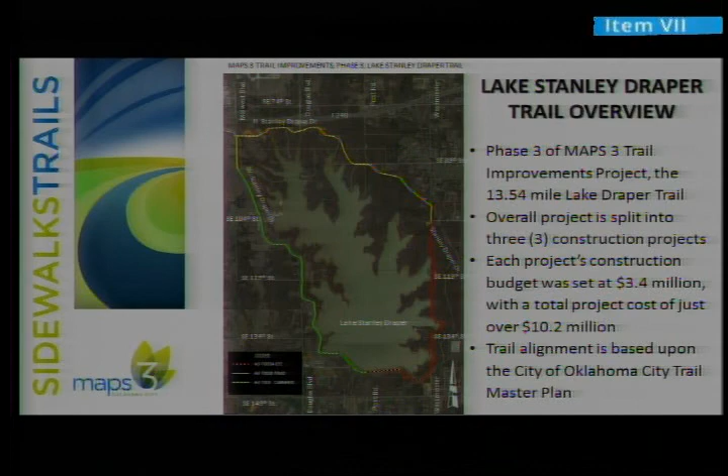The trail does follow the Oklahoma City Master Plan for the alignment in most locations. There were a few adjustments made and suggested by the MAPS Trail Subcommittee that were incorporated into this project. As we go through here, all of the trails are basically following the standard that's been set for previous trail projects throughout the city.

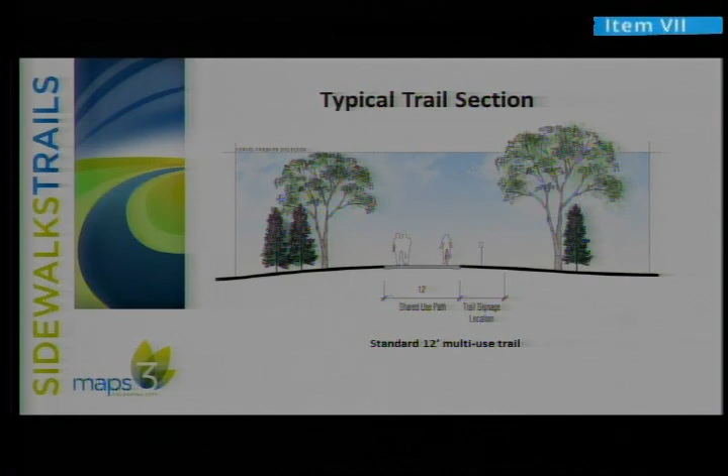It's a 12-foot multi-use trail. It does have trail signage throughout the project, which tells you exactly how far and where you are on the trail system. This trail is more of a rural trail system, so we do not have any signalized intersections. We're utilizing a city standard developed with previous trails for non-signalized street crossings, highly visible for pedestrian as well as vehicular traffic. These will be concrete, consistent throughout the entire Draper Trail for all of the projects you'll see.

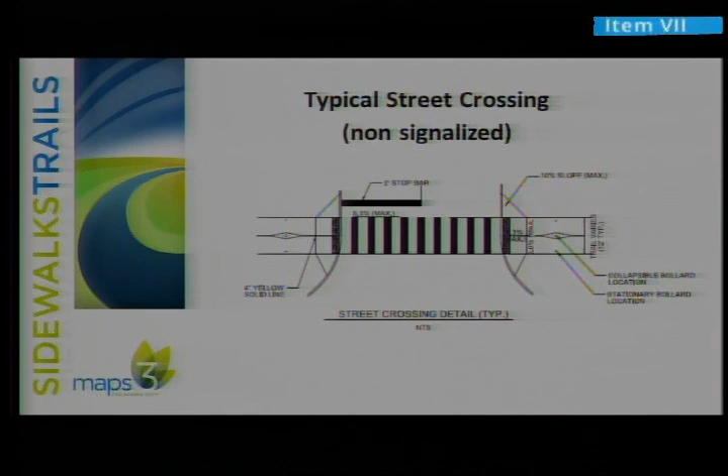Our project is Project T003, basically along the western portion of the lake, probably the more developed area so far. Our project starts at Southeast 89th Street, where we will tie to Mr. Williams' project — that'll be up in just a moment.

It basically follows West Stanley Draper Drive, about 25 feet off of the roadway. If you've been out there, you'll know the roadway has a 45-mile-an-hour speed limit. We want to make sure the trail is off of that, in what we call the clear zone, for any errant drivers that have run off of the road, so they still have time to recover before they get to the trail.

So we want to make sure the trail is visible from the roadway, yet still a safe distance away from any errant drivers.

Our project is a little bit over 5 miles, or just a little under 5 miles. It does have accessibility to the marina area and parking lot that could be utilized as a shared use trailhead location. It does have 3 significant street crossings at 89th, 104th, and a little bit farther down along Water Plant Road. It also has another access to the Cross Timbers trail parking area and recreational area that we could use as another trailhead about midway along our trail alignment.

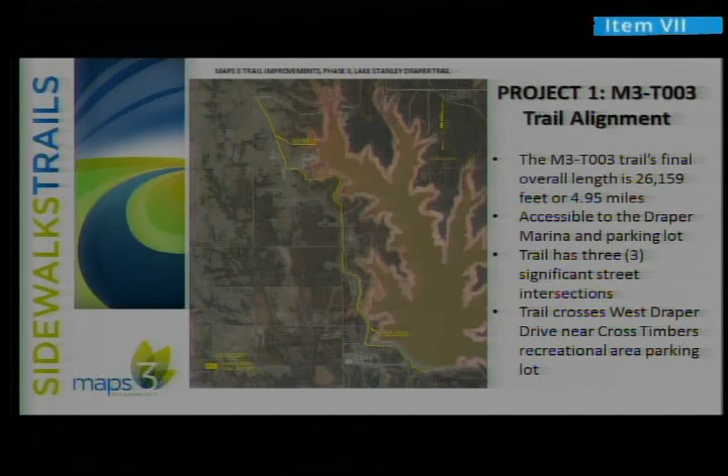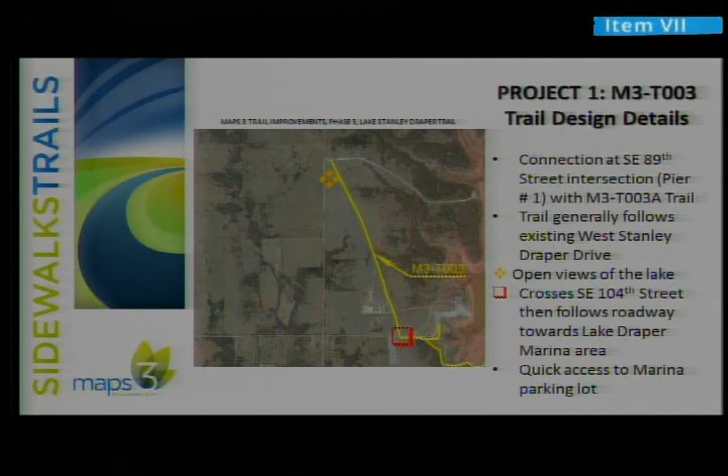As we say, we started basically at Southeast 89th Street. It's a very open area. It does go south and southeast adjacent to the roadway and attaches to the Lake Draper Marina area. Some of the views you will see along the trail, particularly in our area, are a little more open than in some of the areas on the southeast side of the lake. But you can see here we do have some views of the lake as we start southwards towards the marina.

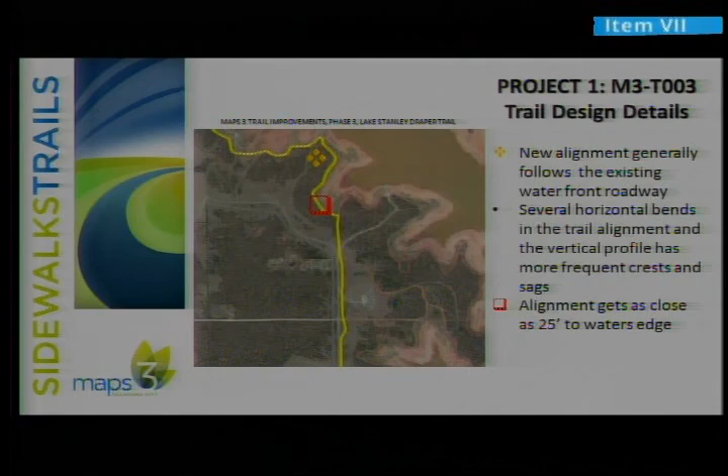One suggestion from the MAPS subcommittee was to get a little closer to the lake, in areas similar to Lake Hefner's trails. We've done that. It did add some horizontal curves to the trail, so bike pedestrians may not be able to speed through this area. They will have to slow down, but we take into consideration that pedestrian traffic will also be jogging through this. So it does have some nice views and vistas of the lake.

The trail will eventually connect to the Baxter Remote Control Airfield. It does have a connection there. We do stay on the east side for a majority of the trail, on the east side of Lake Draper Drive, near the Cross Timbers riding area. We do switch back to the west side through this.

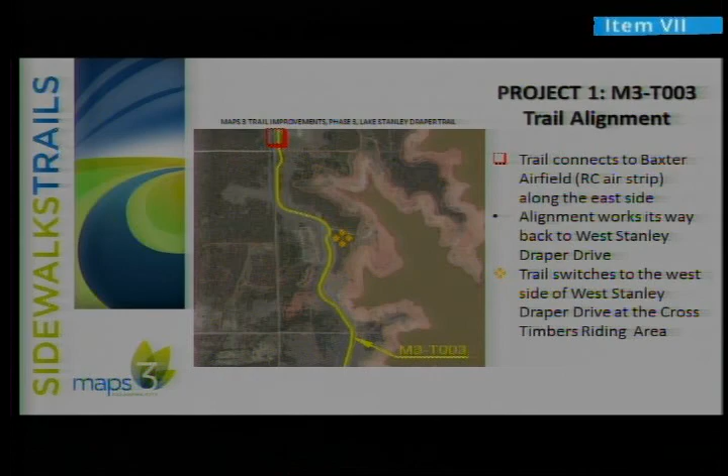We do have advanced signage for both the West Draper Trail as well as the West Draper Drive drivers. Lastly, our section terminates on the lower side of the dam, just to the east of the existing Draper Water Treatment Plant.

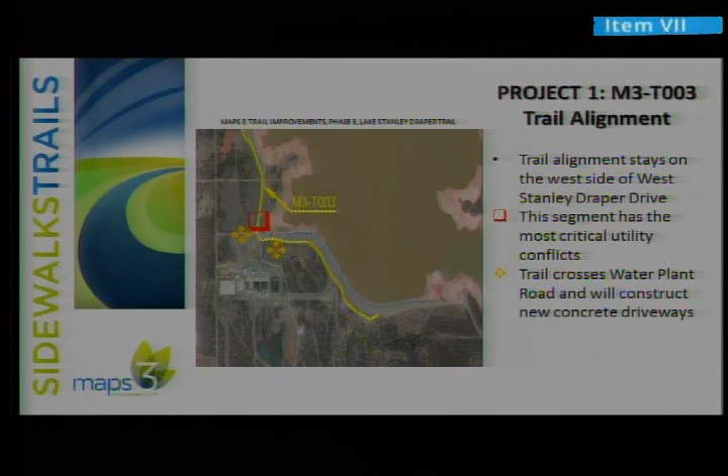It does cross the Water Treatment Plant Road, which right now is under construction. Our project will be there first. So we are going to replace the drives we go through there with concrete drives that will handle construction traffic as well, but it'll also give trail users a very smooth and consistent surface for walking, riding, and biking.

Lastly, as we continue south and east below the dam, we wanted to make sure the trail had a visible view from the dam road itself. We want pedestrians, bicyclists mainly, that are utilizing the roadway to see where the trail is, see how friendly it is, see it's very open, with views and vistas. So we want to make sure our trail is visible from the roadway so we can get some of those bike users off of the roadway and that conflict with vehicular traffic, and get them on our trail system.

As we mentioned earlier, our budget is just a little more than $3.4 million. The initial concept was just above $3 million. As we've made adjustments based on suggestions from the oversight committees, that cost escalated slightly. We've gotten that back down to below budget again. Today, our estimate is almost $3.4 million, and we do still have a small contingency in there just for any anomalies that may occur in the bidding process in the next few weeks. So we are under budget.

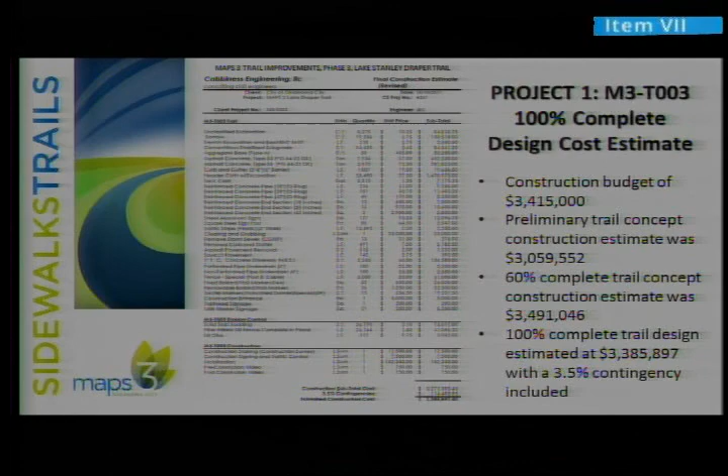Approval today by the council. Our schedule here is we're ready to advertise, go bid this project in late November, come back to the council for award, and be ready to issue a notice to proceed for construction in January. We anticipate construction is going to be 6 to 7 months, weather depending, and construction will be complete in August. Hopefully this trail is used by the end of summer and early fall next year. Happy to answer any questions.

All right, any questions? Thank you. All right, thanks.

Next up is Robbie Williams from Triad to talk about another section of the Draper Trails. There's 3 sections. 2 of the 3 will be going out to bid today.

Okay. Good morning. Good morning. Robbie Williams.

We have the Lake Draper Trail Phase 3, and we will connect with Mr. Cabinet's trail at Southeast 89th. We'll go north. Our trail is on the north side of the lake and the east side. We're more in the rural area. There's no connectivity to any existing facilities.

So I'll run through this. I'm not going to go through a lot of what Brett said. Our project, we are 25 feet off the road for the clear zone and the safety. We have several drainage structures that we have to extend, which we will do. But we will bring the trail in closer to the road and install guardrail, that way we're not spending more money to extend a structure. So with that, we'll get going.

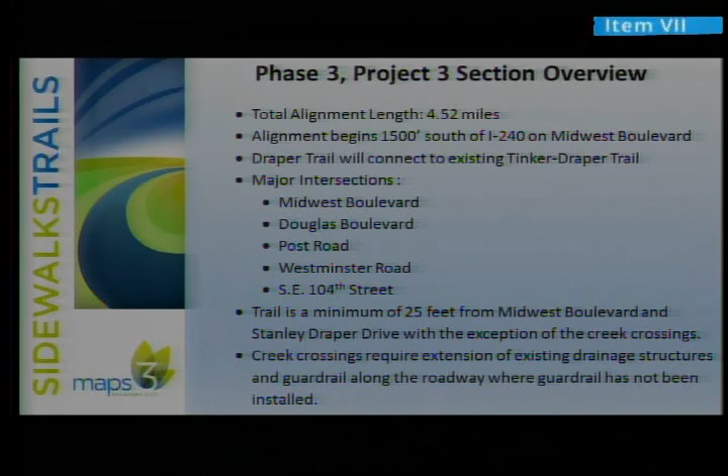Our trail is about 4.5 miles long. We have major intersections at Midwest Boulevard, Douglas Post, Westminster, and 104th Street. There's not a lot of traffic, but we will put in the crossings. I mentioned the 25 feet clear zone and the creek crossings.

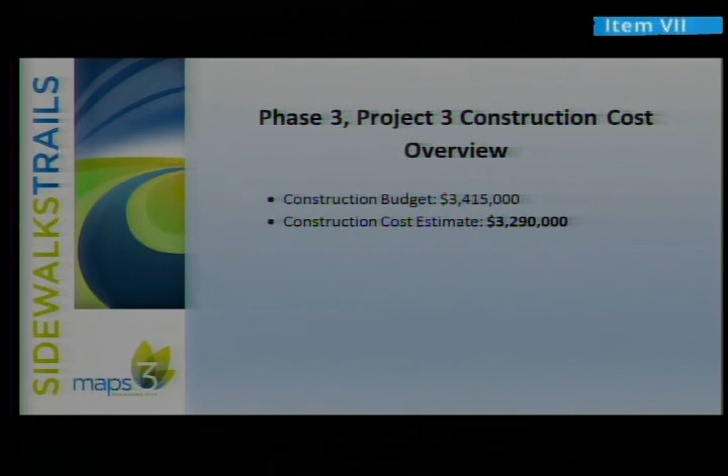Our construction budget is the same as everybody else, about 3.4, and right now we're just under $3.3 million.

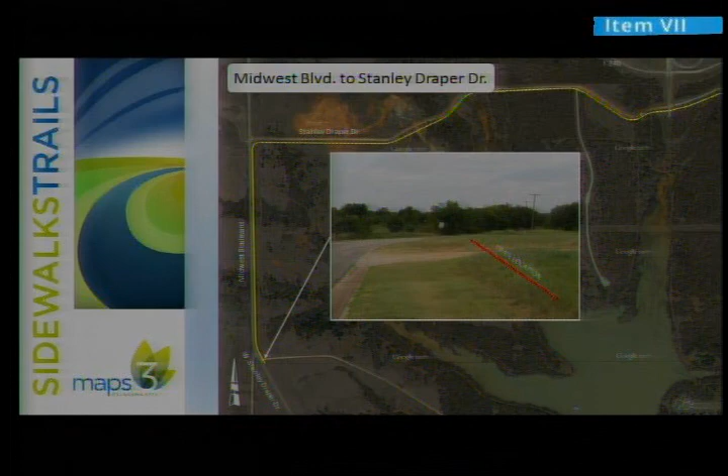We'll just kind of go through the trail alignment with the picture. Again, here's where we connect. The red line will be generally where the trail is located. And as we go along, we do have some areas where we will clear trees and vegetation. One of our project goals is to minimize tree removal around the lake.

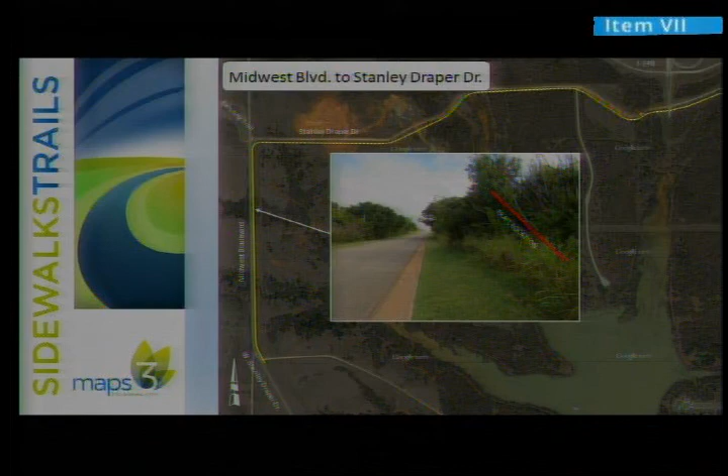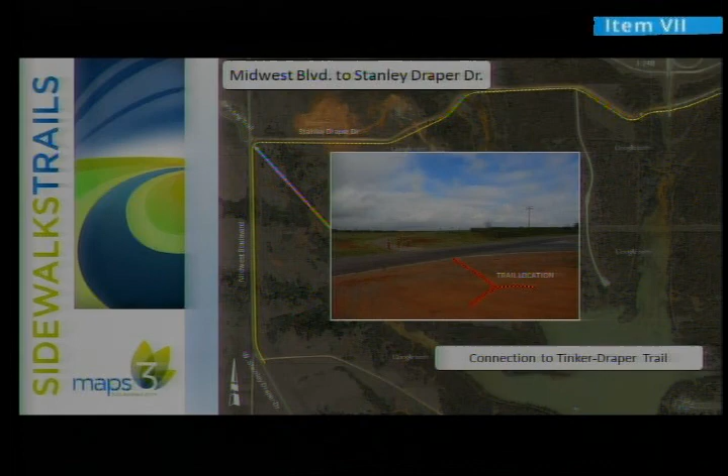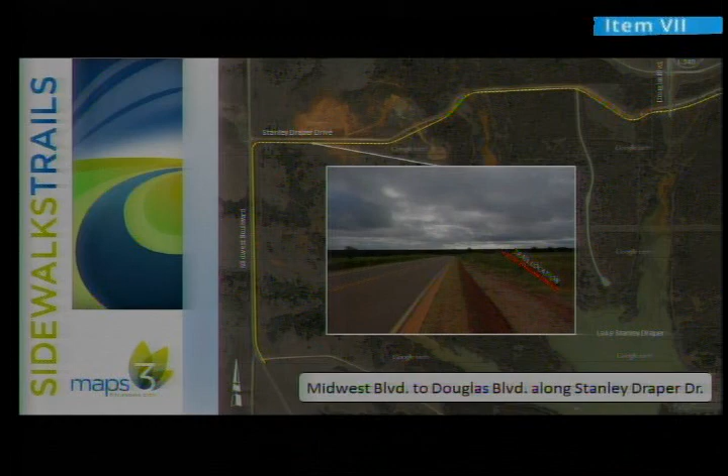Again, here's a drainage structure that we will be extending as we go north. At the intersection of Stanley Draper Drive and Midwest Boulevard is our connection to the Tinker Draper Trail. About a year ago, the Water Trust reconstructed Stanley Draper Drive, so our trail will basically be following the roadway. Again, just another small culvert we will be extending.

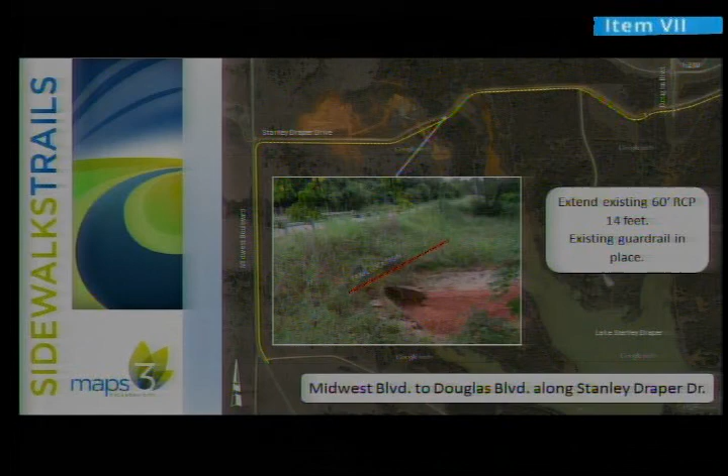Here's where we start getting into the wooded area. Again, another structure - these all start to look the same here in a second. Our trail does have a few locations where you can see the lake, and this is an example of one of those locations.

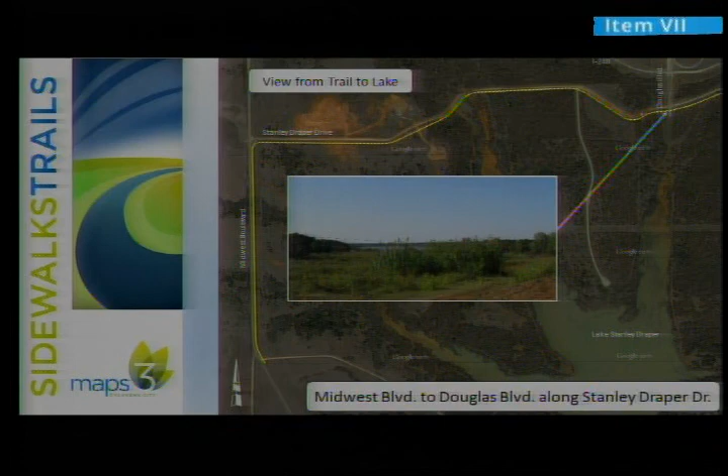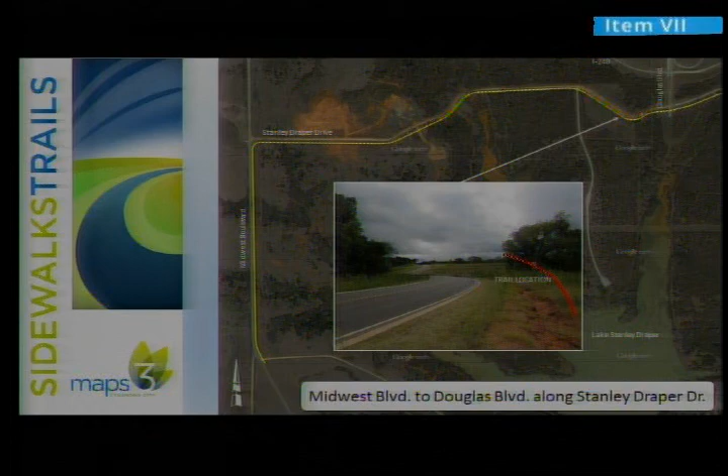Again, we're following Stanley Draper Drive. The new Stanley Draper Drive that was constructed connects to the existing Stanley Draper Drive on the east side, which is actually a 25-mile-an-hour posted roadway. Again, here's another culvert that we will extend.

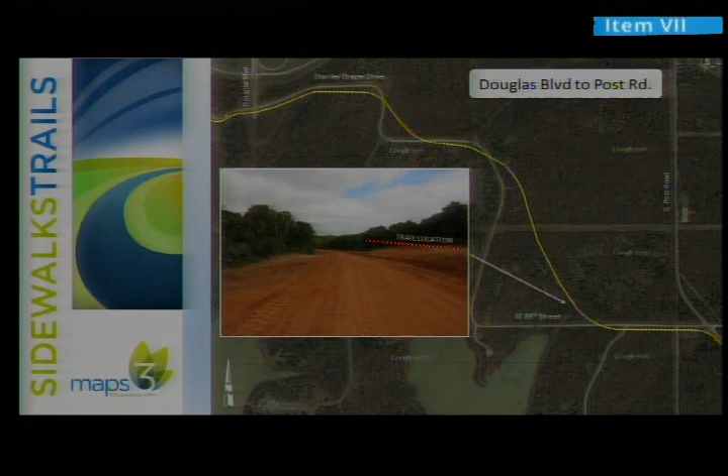And now we get more into the rural part. This was when the road was under construction. Our trail will be up on the hill, and we will be removing a few trees. Here's a good example of where we will have to clear trees, probably about 50 feet wide as we go along the road.

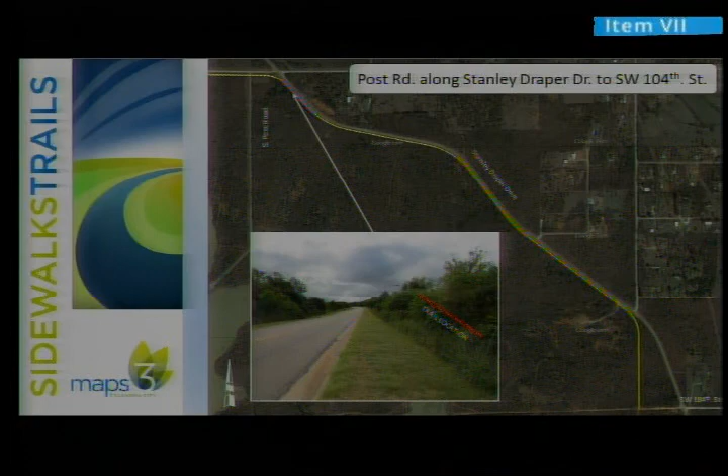Same thing here. And then we do veer off of Stanley Draper Drive, and there's an existing dirt road where we will locate the trail. This is the connection to Project 2, which I believe is coming in about a month.

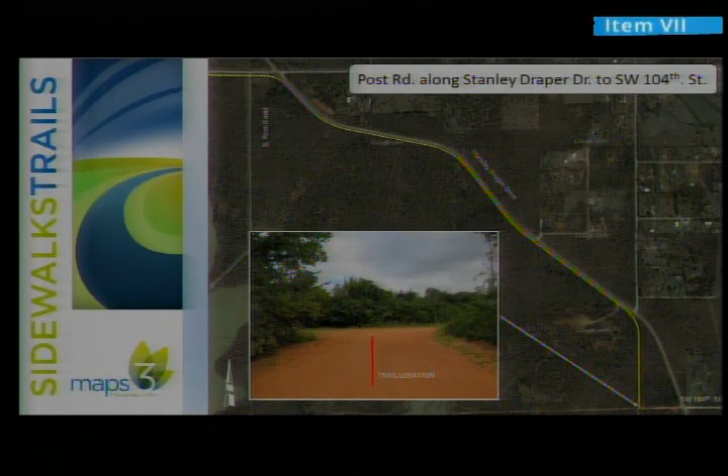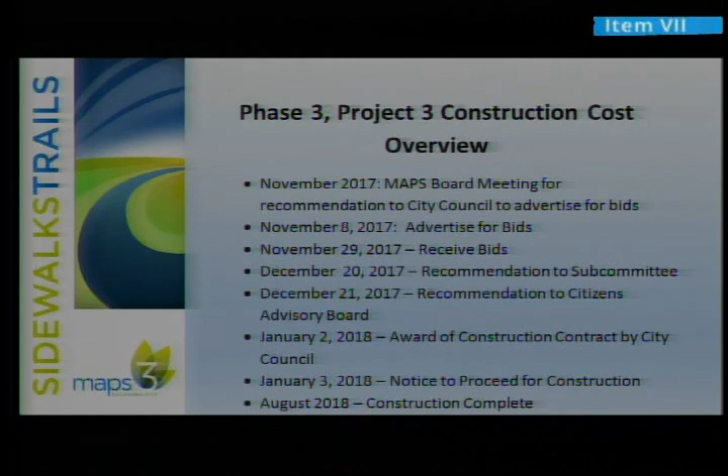So do these two presentations add up to the entire MAPS 3 trail out here? Is that 9.5 miles? No, there's 3 segments. These are 2 of the 3 segments going out to bid today. A 3rd segment will be coming forth in the next few weeks. So what's the total distance of the trail? About 13.5 miles. And ultimately it will tie into our larger system.

Yes. So how many miles is it from the closest point today to where this trail begins? If you're talking Grand Boulevard near Trosper Park? Well, David, can you talk about the connection?

Robbie, you're connecting up at the northeast or northwest corner, right? Yeah, Tinker Draper Trail, he's connecting there. I'm not familiar enough with that trail to know how it connects with Trosper and all that, so I can't answer that right now. But long-term, we have plans to connect this trail with the other aspects of our trail system. I'm not saying it's funded, just that there's a plan to. I think planning's goal is to create a trail system that connects like that.

So phase 2, we expect to send it out to bid in about a month, is that right? This is phase 1 and 3, correct? Right, phase 2 had a couple things we need to get fixed, and we need to stagger those bids anyway so we can strategize how they get bid. It's scheduled to go to the subcommittee next week and then the advisory board, so you guys will see it right around the 1st of December.

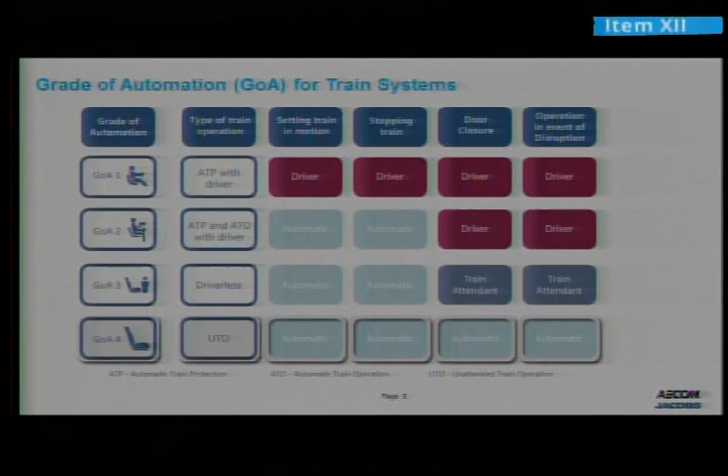There's a lot of buzz lately in terms of autonomous vehicles. Autonomous operation of rail systems actually has a fairly long history. Beginning in 1967, there was the first automatic train operation in the London Underground. The vehicle operates with a driver in the cab, so the driver on board is really more of an operator attending to customers. Next, in 1983, in France, you had unattended train operation. That system has been in operation since the early 80s. There are no recorded fatalities, so it has a pretty high safety standard.

Moving on to grade of automation 2. These are trains that run autonomously from station to station, and the driver remains on board and is responsible for opening and closing doors. One example of that is the BART system up in the Bay Area in California. It's been operating like that since 1972. So there is an operator in the cab, but that person's not actually controlling stopping and starting of the train.

Grade of automation 3: there are none in the United States, but there are some, notably in London, Barcelona, and elsewhere in the world, and those systems have been in operation since 1987. And then finally, grade of automation 4, this is the one where the vehicle is completely autonomous. There are 15 operating in the United States. The example we're showing here is the Miami Metromover, but usually these are vehicles that are on a completely separated guideway, so they're not running in mixed traffic and they're not interacting with pedestrians or cyclists.

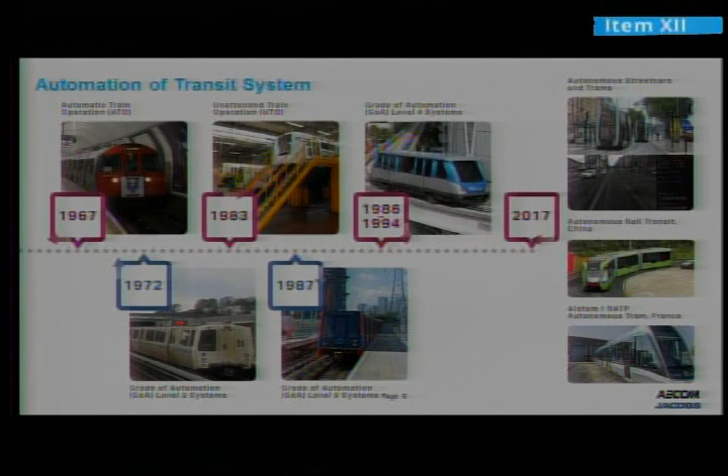Moving on to the definitions of connected and automated vehicles for vehicles, not for rail. The US DOT defines autonomous vehicles as a vehicle where some part of the vehicle function is not controlled by the driver. So those vehicles can be automated and/or connected.

For connected vehicles, there are various levels of connectivity. The first level is vehicle-to-vehicle communication, where the vehicle is able to communicate with other vehicles on the road. Next is vehicle-to-infrastructure, where the vehicle can communicate, for example, with signals or with light posts. And finally, vehicle-to-everything, where the vehicle can communicate with other vehicles, infrastructure, and other users of the right-of-way. So for example, if I'm a pedestrian or cyclist, I would get a notification that an autonomous streetcar is coming up, and I should slow down or stop, and vice versa—the vehicle might know that there's another user of the right-of-way there.

In terms of the regulatory context, it's moving rather quickly in parallel with some of the developments in the technology. There are a couple of federal regulations and guidance documents that are applicable for our study here. The first one is the vehicle-to-vehicle communication guidelines from the federal government, and this regulation proposes that 100% of new light-duty vehicles are equipped with vehicle-to-vehicle communication by 2023, and notably that the communication systems will speak the same language. So for example, a Toyota and a Ford would be able to communicate with each other and other users of the right-of-way.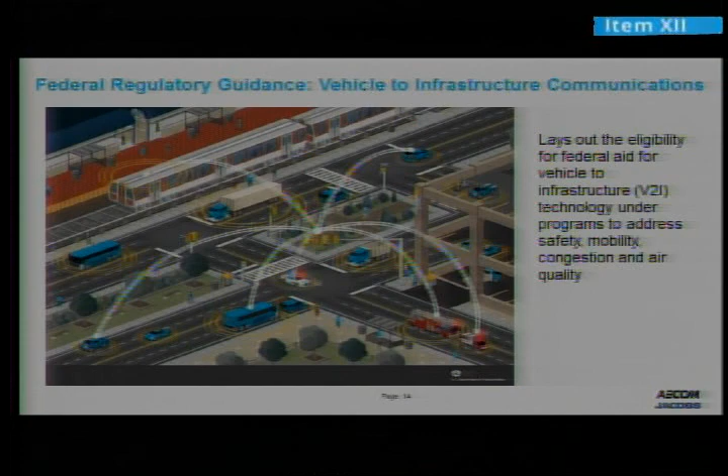Next is the vehicle-to-infrastructure communication guidelines, also from the federal government. This one defines what the federal government includes as a vehicle-to-infrastructure project, and it's notable because we would have to comply with this if we were able to apply for any federal funding for a project.

Looking to the state level, across the country various states have enacted legislation. Since 2012, 41 states have considered and 21 states plus DC have passed autonomous vehicle legislation. Here in Oklahoma, Senate Bill 202 is pending; the last action on it was February of 2019. Essentially, that bill defines autonomous vehicles and instructs the Department of Public Safety to adopt regulations for operation of autonomous vehicles in the state.

But what we learned from the review of state legislation was that it's kind of a mixed bag in terms of what states are doing. The fact that there are no enacted regulations does not necessarily preclude a state or local municipality from moving forward with a pilot project. Some of the projects that have received federal funding for autonomous vehicle pilots are in states where there is no enacted regulation.

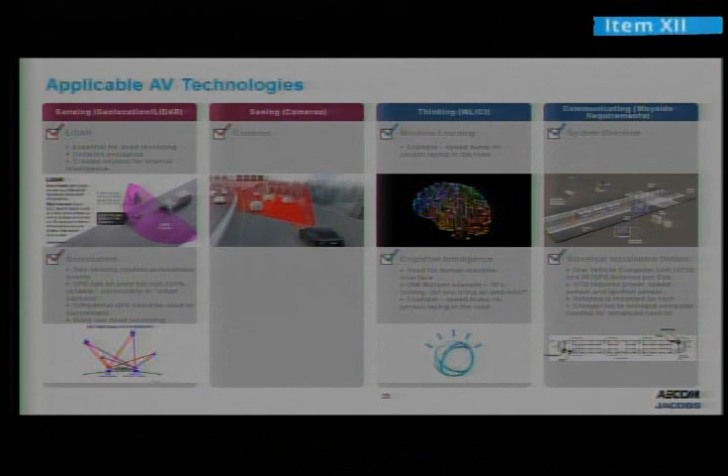Some of the wayside infrastructure would be rather modest. This would essentially be a supplemental computer on board the vehicle with an antenna that would communicate to components integrated with the traffic signal controllers. A lot of this technology is in development and in operation with some bus rapid transit projects across the country, looking at traffic signal priority systems.

As far as the vehicle requirements, we had Bob Heifel help us with a study. He's from Jacobs and has been overseeing the procurement of the streetcar vehicles.

In addition to that autonomous computer that would have to be integrated into the vehicle, we would have to connect all the functions that the operators serve. The next three slides here just give you an idea of all those functions and complexities that would have to be overcome.

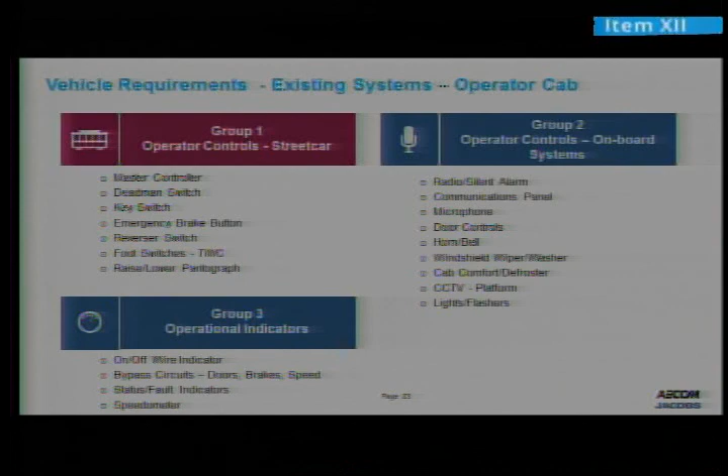Really, why are we looking at this? Why an autonomous streetcar? Well, we think there would be a lot of real benefits to such an operation. First off would be safety and reliability - sensing technology would understand that envelope of the streetcar and have that reaction time to react to safety conditions.

A good example would be with streetcars - often if there's a parked car that's fouling the trackway, or it looks like it's encroaching onto the trackway, an operator will take care to make sure there isn't a conflict, which could slow down or even stop the train. Whereas the sensing technology would understand right off if there is a fouling of that envelope for the streetcar. So there would be certain efficiencies there that would result in reliability.

One of the biggest benefits we see is that with the autonomous level 3 and 4, as Veronica described - with level 3 you'd still have a person on board, and initially you could convert that operator, the person driving the streetcar, into a more traditional conductor, or what we were terming 'ambassadors' in our report. That person would be inside the car with the customers, much more customer facing, and they could serve several needs as far as customer service, but also ticket vending or fare inspection and other functions where some operational cost savings could really be realized.

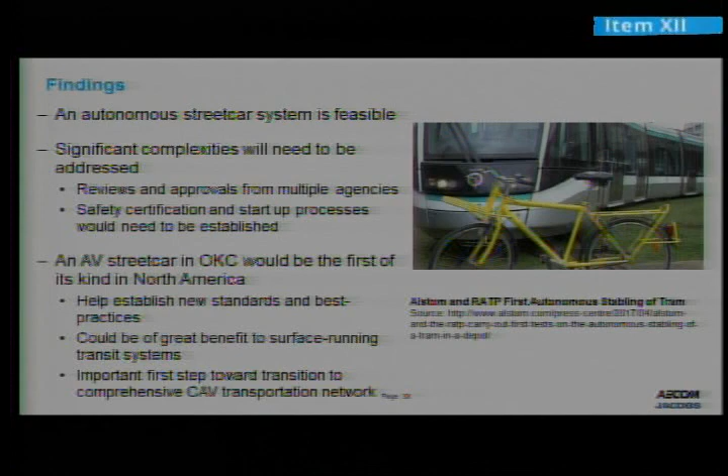Mostly the standards of how this would be rolled out and developed, and how the operations would be tested and incrementally approved by the reviewing jurisdictions, including USDOT, would be an important part of this step of rolling out an autonomous operation.

Overall, because it's the first of its kind in the industry, there would be that benefit to the industry as well. So our recommendation is to undergo a pilot project and to reach out to the USDOT if so desired, but because there would be that benefit to the industry, we feel there would be interest on USDOT's part to help develop this as well.

And so this would be more or less a public-private partnership. There are many in the private sector, including the autonomous vehicle technology people, the private operating sectors, but also the engineering and architectural world, that would be interested in helping develop this. Because there would be that return on the investment, we recommend that we reach out to the USDOT and move forward with that.

So the pilot project itself, the scope of this would be to fully understand the costs and the benefits, but the cost of the logistics of the Wayside and interfaces with the streetcar, and understand all that testing and safety certification for each step of automation as it is incrementally rolled out, or achieved, I should say.

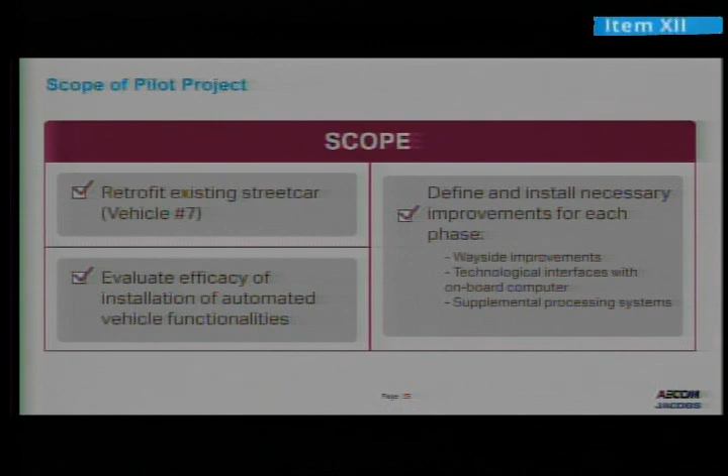We do believe we should just start with one vehicle as part of this pilot project. And then also we'd work to understand and implement what that retrofit of the Wayside infrastructure would require too.

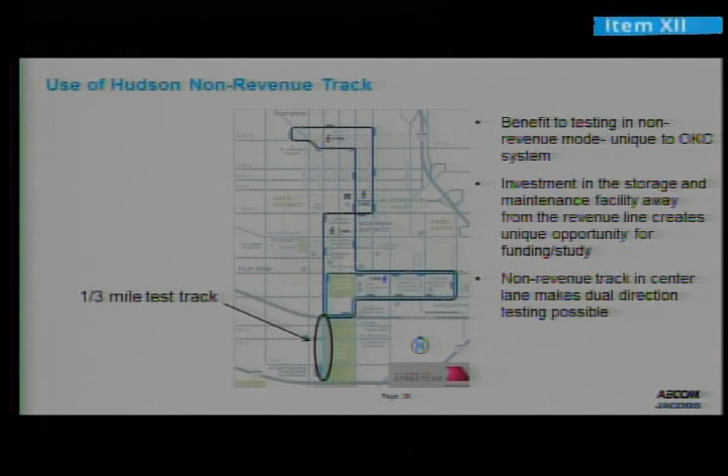Another unique opportunity with your streetcar project is what we call the non-revenue track, the track that goes from the mainline service at Oklahoma City, or Oklahoma Boulevard, down to the maintenance facility. This is a little more than 1/3 of a mile down Hudson, and this would be an environment that would be easily controllable and could serve as a perfect test track for the autonomous streetcar to roll up and down as those testing requirements were figured out.

And with a pilot project, we would take an incremental approach, so with each phase we would have that level of autonomous operation, as Veronica described. We'd start with level 1 and then go to level 2, where the driver is in the cab and monitoring the situation. But then we could eventually increase the autonomous operation to level 3, again all on that non-revenue track, going up and down that 1/3 mile.

But then maybe as we achieve each step, we can expand that into the Bricktown loop, the 1-mile loop that goes into Bricktown and back to the convention center. Each of these phases of the pilot project would document the requirements of safety certification and testing required. We're doing this already for your initial streetcar job, but this would be something new, and this would be the result of the pilot project, and that would be a meaningful document for anyone else in the future undergoing a similar initiative.

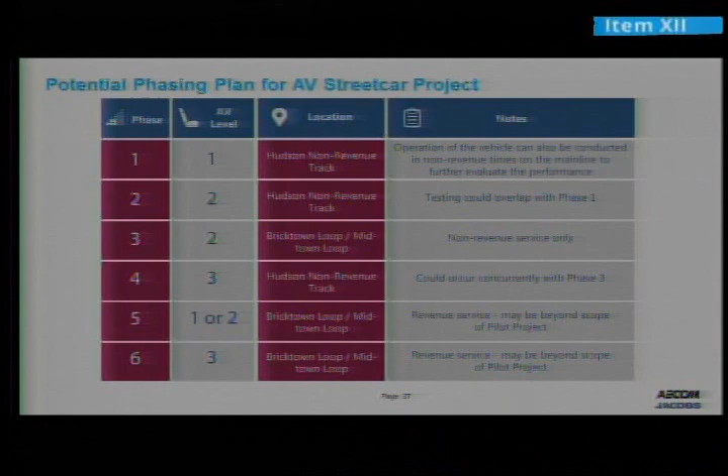We also think there should be a public outreach component to this, mostly to educate the public and make them aware of what is going on, but also to understand any concerns. We also think there might be an opportunity to get other participants involved in the initiative.

Because the streetcar itself would be this rolling data collection and processing unit, maybe there's other applications you can leverage from this, such as monitoring on-street parking and where vacancies are.

We also, I didn't mention it before, as far as the public-private partnership - next slide, sorry. So again, we think this is an opportunity for a public-private partnership. We've put together an outline of a funding program we think would be about a 3-year effort, would be reasonable.

We think the grant application from USDOT should be on the order of about $3 million. And then there would be a certain amount of contribution made by other participating entities, mostly in the form of time donated towards the effort.

We think there should be an outreach to the universities to get them involved, but also, as I mentioned, from the private side with the operators, the vehicle supplier, and the autonomous technology suppliers as well.

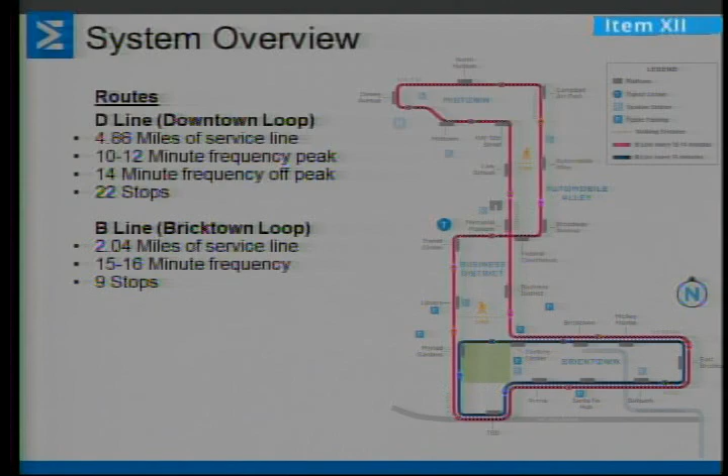Looking at our service span, the D line will operate Monday through Thursday 6 a.m. to 12 a.m., Friday 6 a.m. to 2 a.m., and Saturday 7 a.m. to 2 a.m. The B line will have the same service span as the D line, only as we start the system, we'll have regular service Friday and Saturday, and run the B line when we have events and conventions occurring.

You'll notice that the only Sunday service we'll provide will be when we have events and conventions. So when we launch the system, that's the extent of the Sunday service we have planned.

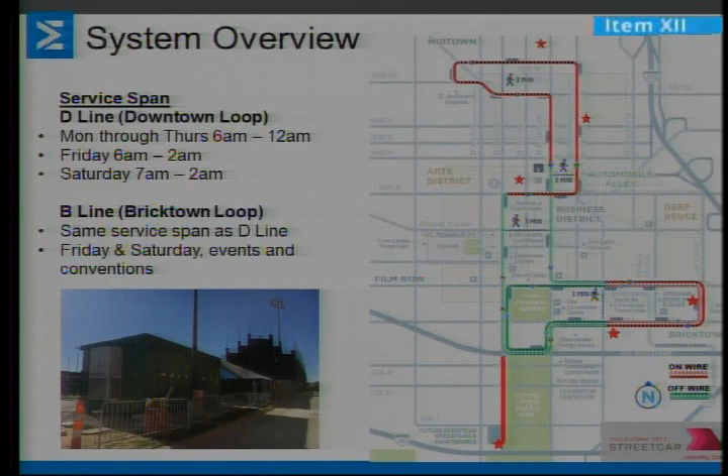Okay, so looking at operations preparedness. As you can imagine, 14 months away from streetcar operations, Embark staff, Herzog our contractor, and their staff are very busy getting ready for all the things that go into preparing the Oklahoma City streetcar for operations. We're looking at about a 14-month timeline with several major objectives to accomplish over that period.

So, storage and maintenance facility. We're looking to move in January of 2018 following the completion of the building in December. I wanted to give council a sense of what is going to occur in this building. We talk a lot about it being the storage and maintenance facility for the vehicles, and this is true - this is where they'll be stored, this is where we're going to work on the vehicles and maintain them, but this is really going to be the operations center for all of Oklahoma City Streetcar.

This is where all of the staff will report for duty. We have training facilities located within this building so that we can train people that need access to our right-of-way. We can train employees, and this is the location of the control center. Supervisors on duty will be able to monitor the status of the system from visual displays, identify the location of the vehicles, the status of the traction power substations and the electrification system - all from within the control center.

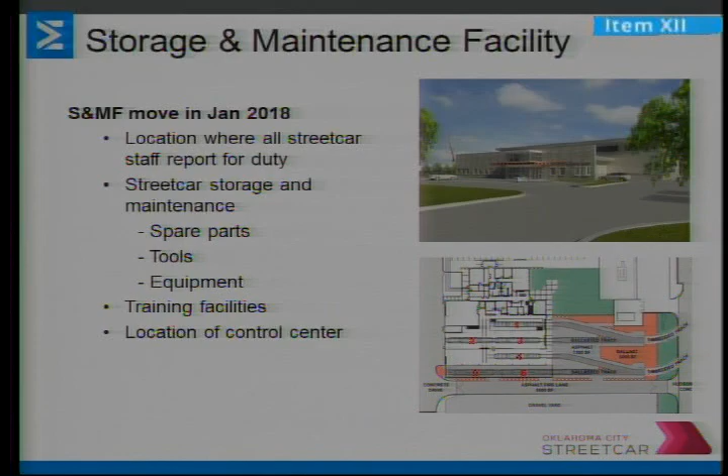As far as major tasks go, as we begin moving in January, we'll not only be setting up the administrative offices and making sure all of our technology is working, but we'll begin ordering parts and special equipment and inventorying those appropriately. A few pictures here of the storage and maintenance facility.

So vehicle delivery and testing - as Mr. Couch had mentioned, we do have some flexibility in delivery, which is a good thing for our operation. Once the storage and maintenance facility is complete and we have begun standing up that particular building, then we'll be in a position where we can receive delivery of the vehicles and have a place to store them. We're looking at taking delivery of vehicles probably somewhere in the January to March timeframe.

Just to give you an idea of the type of inspections and testing that will be done: first, before the vehicle even leaves the factory, it will go through a first article inspection, where the factory production manager and the MAPS 3 consultant that has been on site since the vehicles began production will go through a checklist of different items, making sure the vehicles were built according to specifications. Once they arrive in Oklahoma City, Brookville representatives will be on site.

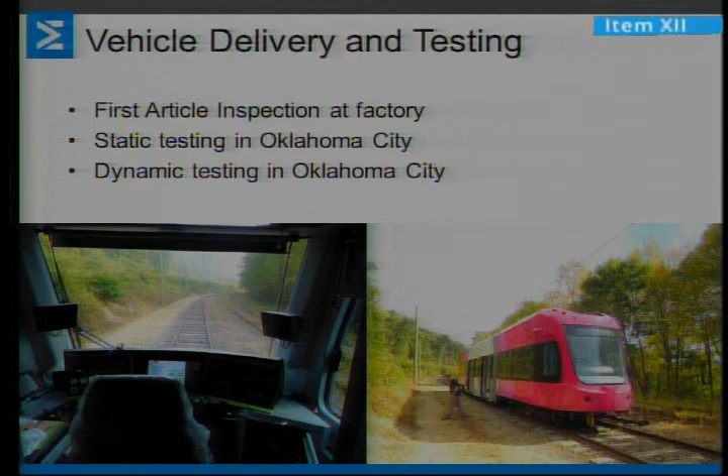It was a very productive trip. We mentioned inspection and testing. Several of us from Embark, the MAPS 3 office, our state safety oversight office, and Herzog, our contractor, took a recent trip to Brookville, Pennsylvania to inspect the vehicles while they are on the production line. We timed it just right so that all of the first 6 vehicles were in production, so we were able to look at vehicle number 1, which is pretty much complete, all the way down to vehicle number 6, which is just getting framed, and everything in between. It was very, very enlightening, very informative.

I won't spend a lot of time talking about construction. That's being managed by the MAPS 3 office, but it is a critical part of being ready for operations, and that is monitoring the construction schedule and participating in the construction meetings. This image will give you an idea of where we're at on some of the main pieces of construction. You can see with the table on the left that we have about 73% of the utilities clear. Track demo is at 50%, track installation at 44%, and the OCS foundations, or the foundations for the overhead catenary poles, is about 44%. It's color-coded so you can see what parts are occurring on the route.

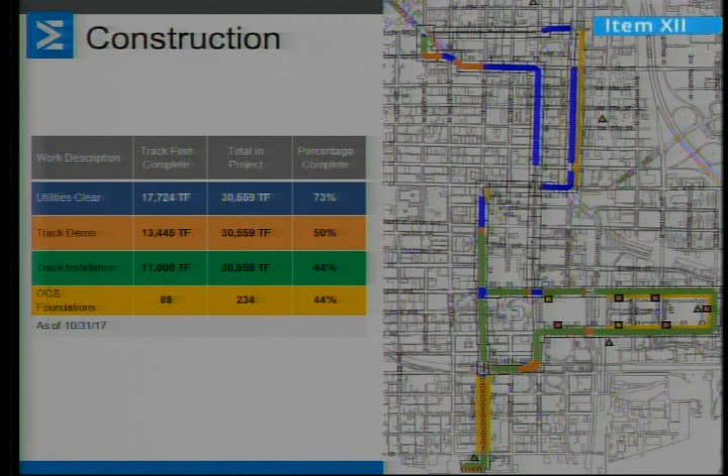Talking briefly about staffing. For a successful streetcar operation, we have to have adequate, well-trained staff in place. To give you a sense of what we're doing as far as Embark staff goes, we have had a streetcar operations manager on staff for a little over a year now. We've had a lot of support from our safety officer, our public information office, our administrative support staff, helping the project move along. Eventually, as we get closer to revenue service, we plan on adding a customer service representative to our staff as well, to extend our call hours some, but also to address what we anticipate as some additional volume at our call center.

One of the things we think is very important from a customer service perspective is that for customers using the Oklahoma City streetcar, it shouldn't matter whether it's Embark or Herzog, it's all Oklahoma City streetcar. When customers have questions about the service, they'll call the Embark call center. The uniforms, for example, will even be approved by Embark. They'll have the Oklahoma City streetcar logo as well as the Embark logo. So from a customer experience, although we have two different groups responsible for the operations, the idea is to make it seamless and unified for the customer.

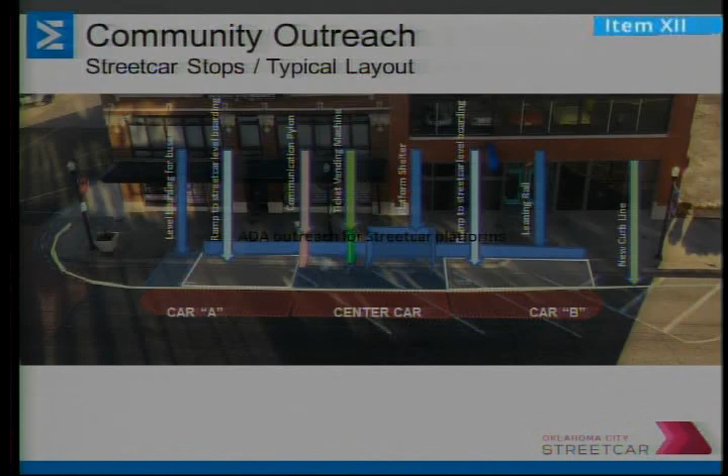This is the stop we mocked up at 8th and Broadway, and we invited the Mayor's Committee on Disability Concerns to come out and join us at that platform, so we could help educate that group and receive their feedback. We had about 8 to 12 folks from that committee show up and join us, and we will conclude that education piece with a similar tour of the first platform as it's completed, which will most likely be the ballpark stop platform. Again, the idea there is to get that committee's input on the best way to communicate how to use the streetcar to the ADA community.

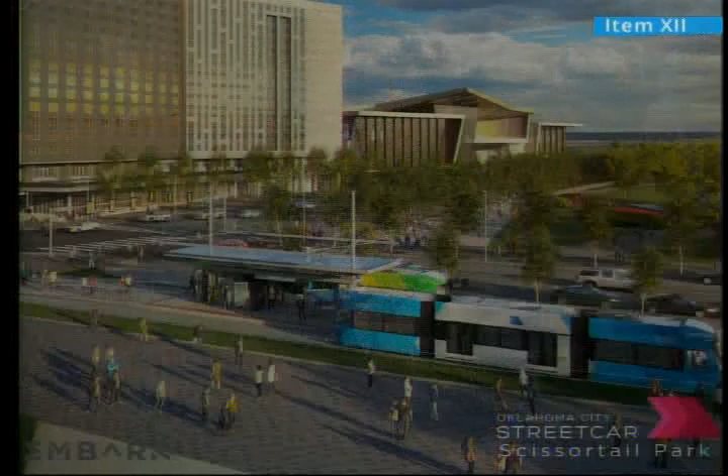Okay, the next rendering I wanted to share with you is a unique stop in the system. This is the Scissortail Park stop at the corner of Robinson and what will be the new Oklahoma City Boulevard. You can see in the background a rendering of the convention center along with Scissortail Park and a proposed convention center hotel, and just out of sight is the Chesapeake Arena. What makes this stop unique is that it's double tracked - streetcars can serve the stop platform from both sides. Also, as a reminder, as the streetcar moves from Robinson over to Hudson, it will be in a dedicated right-of-way on the north side of the boulevard.

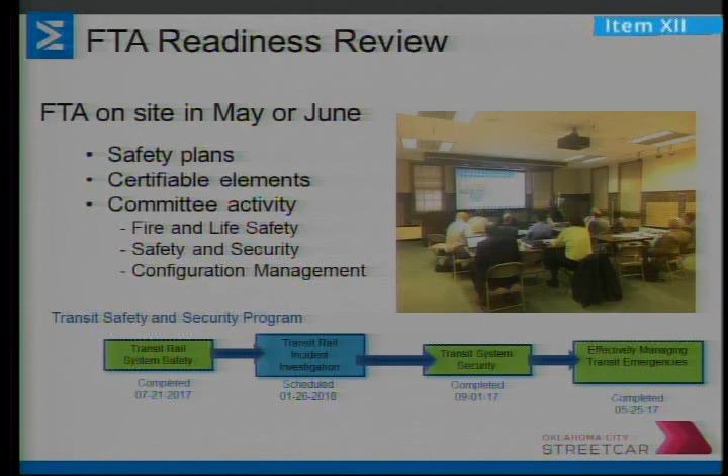Okay, so with that, that's an overview of what we have been working on behind the scenes getting ready for operations, and we expect there'll be more to add as we get closer. I'll be glad to take any questions.

All right, questions for Jason? A couple of questions, sir. I have a bike, and I want to ride on the bus or the streetcar. Where does the bike physically go, where is it located? Yeah, so in the mid-section of the car, there's actually a location where there's no seating and a bike rack.

And then second, you talked about stop layouts and planning for that. It can get awfully cold and wet and windy in January. What are we doing to protect people from the elements at the stops? Well, there is a shelter, and I can back up to that. So there is a shelter at each one of the stop platforms, and you can see it here with individuals sitting under the shelter. The shelters conform to our current standard, which is 3 sides. And also keeping in mind the frequency on the streetcar, being 10 to 12 minutes during peak, 14 off peak, hopefully the wait won't be too long.